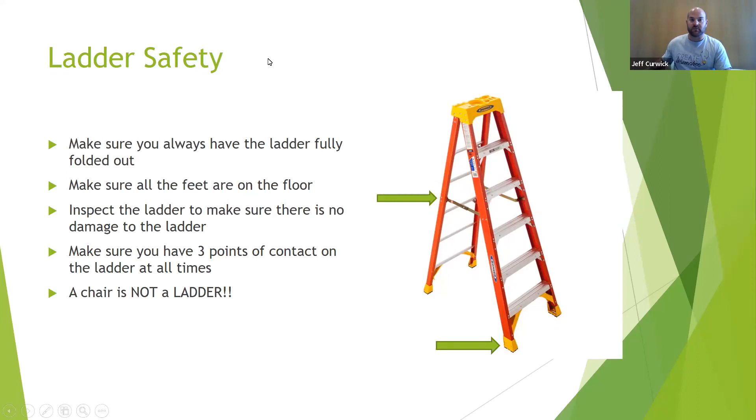If you don't have one, we need to get one. That is the best safety that we can have.

Electrical safety: the biggest thing is extension cords are not permanent solutions for not having an outlet. Extension cords wear out. I've seen them in classrooms running through the ceilings and coming out of the ceilings, from teachers trying to put their projectors up on the wall. That school has been torn down and replaced, and it was one that I opened, but we do not want to do that.

I want to make sure you look at your plug. Your plugs will still work without a ground on them—that's the bottom pin of a 3-pronged outlet. The ground is very important. Later in the slideshow, I have how to replace an electrical plug. You want to make sure you have that plug grounded.

Oh, I'm losing my connection, it says, but that's all right.

We'll keep going. If you're going to do anything with the wires in the wall, please make sure you turn the breakers off. That's pretty self-explanatory—we don't want to be dealing with live wires. Later in the slides, I'll have how to turn on and off breakers. When pulling anything out of an outlet, make sure that the breaker's off.

I have a good story for this one. I went into one of my schools and opened up the breaker panel, and the breaker kept popping. So I went back to the room to see what was going on, and a student had stuck a staple in the wall, which connected through metal in the wall, grounding it out and popping the breaker. Obviously I didn't want to grab that wire. I don't know how that student didn't get shocked or something worse didn't happen to them—burns, it could have started a fire.

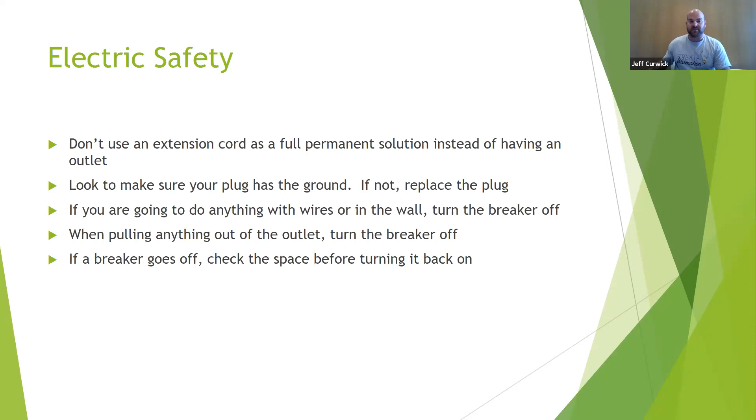We're going to get into HVAC, your heating and cooling systems. You probably see on the left side of your screen the two air conditioning units. Most of our library buildings will have that. Some will have chillers, which we'll get into, and then your furnaces.

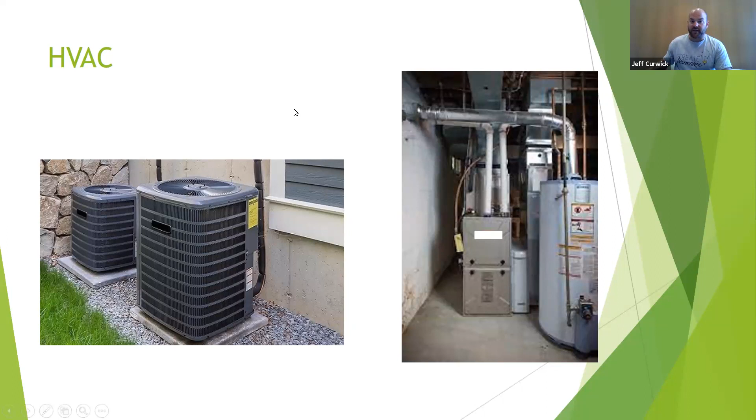In the front there, the white unit on the right side is a water heater, and right behind that with the white box on it is a furnace. So you probably have a room with 2 to 3 furnaces in it, and another space that has either a gas or electric hot water heater. We're going to get into more of that in some future slides.

Filter changes are one of the biggest things you can do for indoor air quality of your building. It's fairly simple to do. During COVID, we moved our filter changes in my building up to every 3 months. It's fairly cheap, it's very good. There's a whole bunch of different ratings on filters, we'll get into that, and your filters are on the return side of your system.

Some people may have filters in the vents in the ceiling, there might be vents in the wall that have filters on them, or there may be a filter on the return side. They can be anywhere from 4 inches, 1 inch on your smaller systems. In my system in this building, we have 2 sets of filters, one 4-inch and one 2-inch.

Fun fact, MERV 13 filters were actually made out of the same material that N95 masks were made out of during the pandemic, which made them extremely hard for me to get my hands on for our filters. But that's just a fun fact. I like to use MERV 11 or higher.

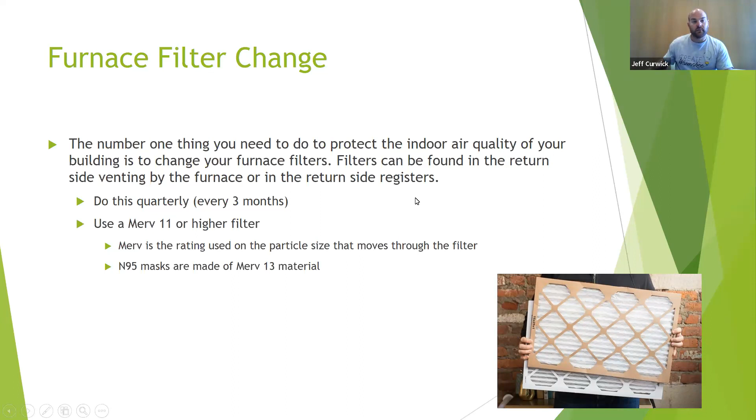Here's the filter scale for MERV, which I think is another good thing to have. We have 6 through 8, which lets large things through. 8 is for pollen and pet dander, up to 11 - and that's why I suggest 11 or higher, so you can get bacteria and that type of thing out of the air with MERV 11 to 13 filters. They usually cost a couple dollars more per filter. If you're buying them per case, it really doesn't add up to much, but it's going to make your air quality a lot better inside of your buildings.

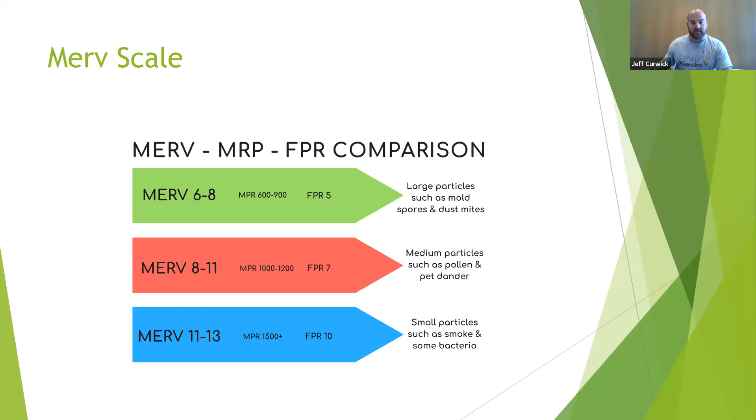With AC units, we want to make sure that we walk around and take a look to make sure they don't have debris on top - leaves, and I've seen kids throw rocks inside of there, or bark around the outside of your building. Walk up, take a look. The fans are on top, and you can burn a fan motor out fairly easily if there's something on top of that AC unit.

I have a company that comes out and checks a couple of my other buildings' furnace and AC once a year. You can do it once or twice a year. It's usually around $100 to $150 per unit to have them come out and service it. They check the pressures in the units and make sure everything's running properly. They'll go into your furnace side too and check those units to make sure the burners are clean, your igniters are clean, which make them start, and those type of things.

In the wintertime, we cover our units in Wisconsin. We do have ice and snow that get on top of our AC units, on top of the fans, and get inside of there. So if they are covered, please make sure you take the cover off. This actually happened at my house - I covered the unit, and my wife turned it on without uncovering it, and it burned up the unit. It was on for a while. The unit gets pretty hot, hence why the fan is on there, which sucks the air through the unit to disperse the heat. We'll get into that more with chillers, but it's basically a small refrigerator that's being used. So that's why we cover our AC units.

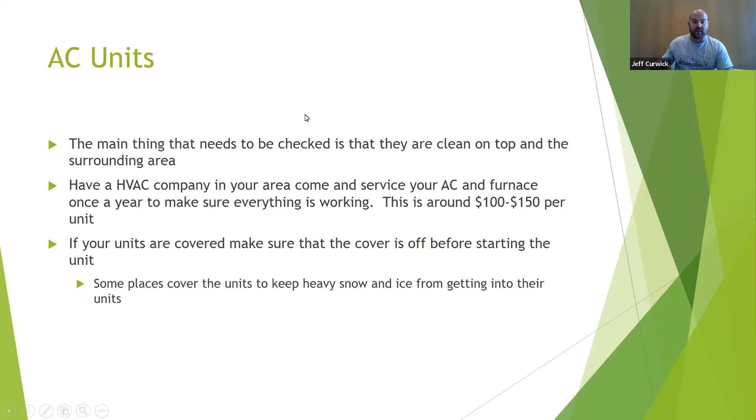Gas shutoffs - I was at a library recently, and the director did not know where the shutoff was. In my photo right there, you can see the arrow, that's a gas shutoff. You will have the gas shutoff on your hot water heaters, and you will have them on your furnaces.

If you do smell gas, go turn that shutoff off, sweep your building, and send everybody out. Gas will smell like rotten eggs. You can call your service provider - down here, I've used MG&E.

We had this happen in a kitchen at one of the schools I worked at, where it smelled like gas. So we actually shut everything off and evacuated the building. The gas company comes out and they have a detector they use - they call it a sniffer - it has a long wand on the end, and they can stick that into where you believe the gas is coming out and take a reading to let you know if there is a leak or not. We luckily did not have a leak at that school.

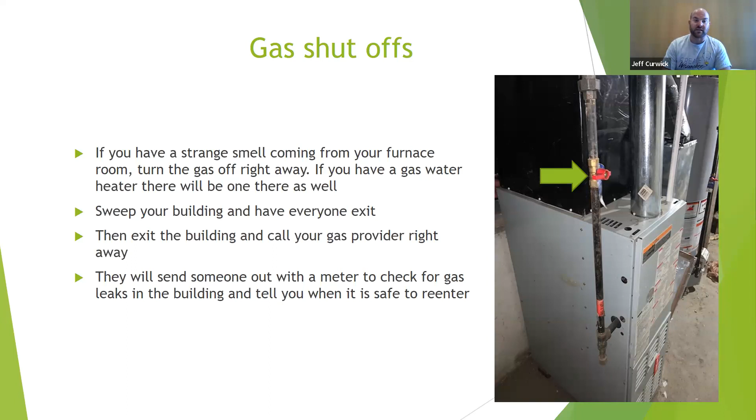Sometimes you'll get leaks from some fittings that just develop over time. If you smell that, the first thing you can do is check your floor drain, which we'll cover later in the slideshow. If it's not coming out of your floor drain, then shut your gas off, evacuate the building, and call your gas provider.

Boilers. Some systems have boilers. Boilers can be used in my building here. I have a boiler.

Boilers are on the hot water side of your system. So if you have heat registers that run on hot water, in-floor heat will actually have boilers. We have in-floor heat in our children's area at the building here, so that uses our boiler.

They're basically just a hot water heater on steroids. They're ginormous. They are a closed system, so you don't have to add water or take water out of the boiler system.

They actually have antifreeze in the boiler called glycol, so that if the water gets below 32 degrees, which it should never get below, it won't actually freeze. I've had the water as low as 20 degrees in one of the schools I was at, and it didn't freeze. That system was a geothermal system without a boiler.

So we want to make sure we do that. Most of the time in your buildings, it'll run off gas or natural gas, is how your boiler system will work. They do run off of oil and wood. So if you drive by in rural Wisconsin and you see a wood burner outside, a big shed with smoke coming out of it, that's actually a boiler system.

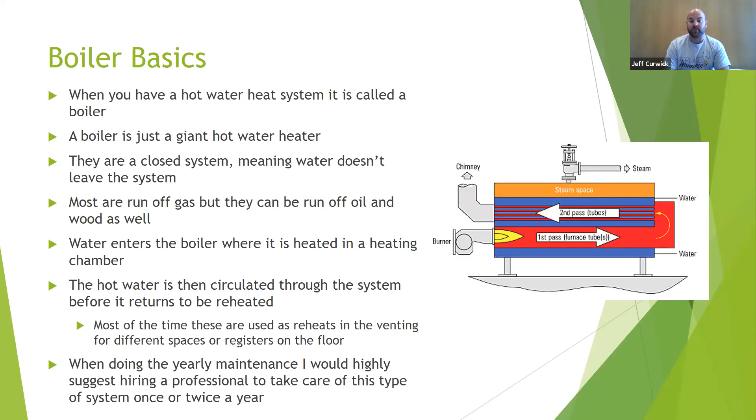Here at my building, I get it twice a year. I get it once in the spring, they come through and go through my cool water system, and once in the fall, they come through and go through my hot water system.

So this is our chiller. Our chillers are just like our hot water side, our boiler side, but it is cold water that is used to go through. It is basically a giant refrigerator unit. So what you have in your refrigerator is on the floor or in an air conditioning unit. This is huge, we have a giant one on our roof.

They can be wet or they can be dry. Basically, the difference is what cools the refrigerant down. It's either water, but most people will have a dry system, which is air, which is the same thing as our air conditioning units that we had in earlier slides.

Basically what happens is water gets pumped into the evaporator. The evaporator comes in, it takes and uses refrigerant and pressure to squeeze the hot air out of the water, and it comes back out into a tank, which is then pumped through our systems, and we're using that air to then cool the spaces that we need it to cool.

The biggest thing that we need to make sure that we do is that our condenser units, which are outside, the big units, are free of leaves, and the same things that we checked for our AC units, we make sure there's no leaves.

The biggest thing that I get, and that most places will get with this, will be leaves, those little helicopters that come off of the trees, the seedlings, and then cottonwood. I have along a creek, so I have a ton of cottonwood that gets in here. In cottonwood season, which was just last week, I have to go up there almost every day.

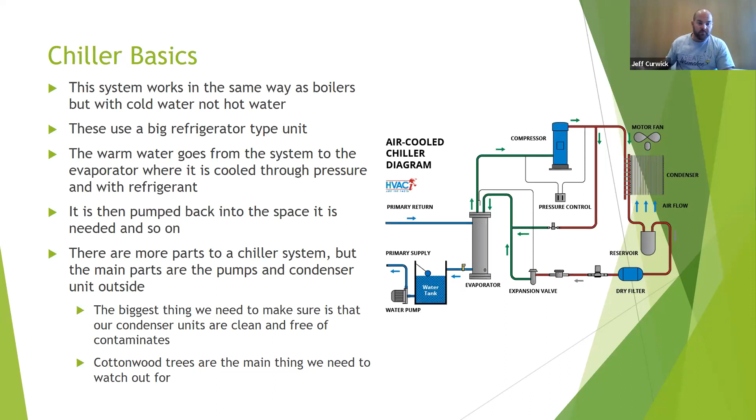So that is our basics on our HVAC systems. Now we're going to get into some plumbing. Plumbing looks like this. People look at this and say, oh my gosh, what am I going to do with plumbing? There's the sewer side, there's the hot water side, there's the cold water side. It's leaking, I don't know what to do.

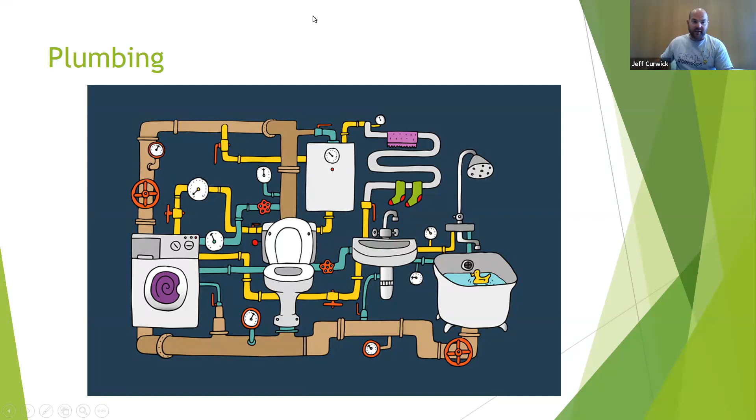One of the big things that most all drains on the sewer side have is called a P-trap. A P-trap is basically a plumbing trap where the water sits just above the line of where the sewer comes off and goes into the wall. If you look at this lower one, the P-trap is the lower U shape right here, and water will fill up from right there to right there, if you can see my cursor. So what happens is this stops sewer gas from coming into our buildings.

So if you drop jewelry down a sink, which you very well might run into in a library setting, somebody might drop an earring or their ring down the sink and it falls down. It's going to be heavy enough that it should most likely fall into the P-trap. If it falls into the P-trap, there's a slip joint at the top and a slip joint at the bottom. Take the bottom rear slip joint and loosen that one all the way off and push that up towards the wall. Remember, there's going to be water in here, so it will go on the ground, so put something to catch the water underneath. It won't be much, should only be about a cup or two.

So 8 ounces, 16 ounces, it's not going to be a lot. Loosen up this upper slip joint as well, and you should be able to pull the P-trap straight down, dump it out, and your jewelry or whatever fell in there should be in there. So it didn't go completely down the sewer, didn't go everywhere. It should be sitting in there. If it's not, well, then it's gone. But the best thing you can do is take this off. It'll be in bathrooms, kitchens, everywhere that has a drain should have a P-trap on it.

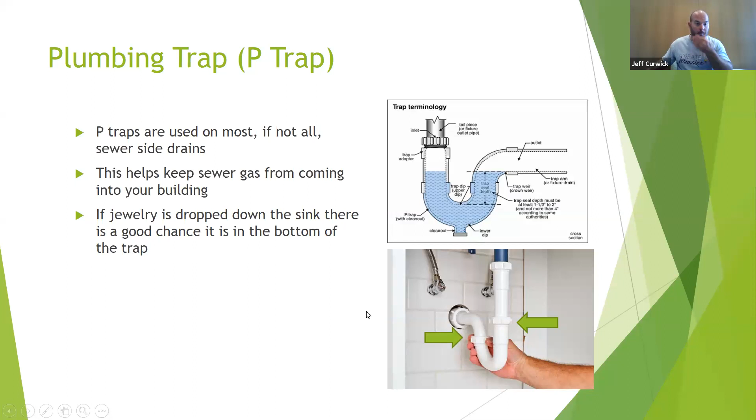Floor drains. These will be found in your HVAC closets, anywhere that you have air conditioning that runs in. It's a very big, common problem.

I actually went out to a library. She had been smelling something, the director, in her HVAC closet. And she called and said, I think I'm smelling gas. They came out and said you weren't smelling gas. She had been there for about a year, and I went out there to look at her building. I put my hand right on top of the floor drain, and you could actually feel some air coming out, which tells me that the water had dried up in the floor drain.

Under the concrete will be one of those P-traps. What I was always told, and what I believe is probably the best practice, is to put 8 ounces of water per inch of diameter across your pipe about once every 2 to 3 months. So basically, if you have a floor drain, put 2 to 3 coffee cups of water down there. It'll sound hollow when it falls down into the drain. You aren't going to put too much water down there. It will go down into the sewer. So fill that P-trap up, and you should lose that smell of rotten eggs coming out of there. It is just sewer gas. Sewer gas isn't dangerous, it just stinks.

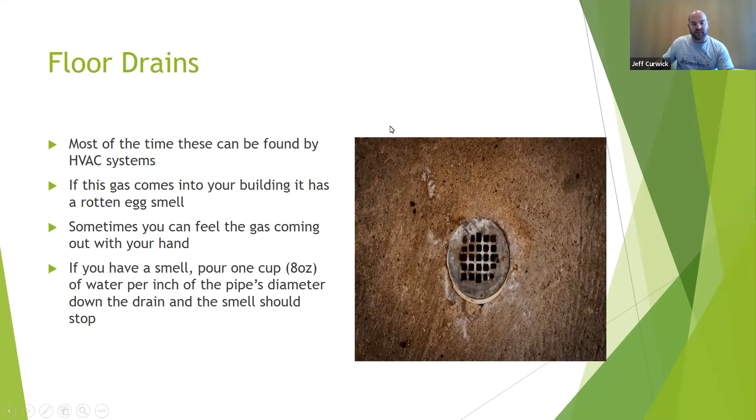Shutoffs. If there is water on the floor, check your trap. If it's not your P-trap that's leaking, turn off your water valves. Your water valves are everywhere there's an arrow - there's one on toilets, there's one on sinks. These shutoffs should just turn, and it will turn the water off going to the sink or toilet. If you have a toilet that's leaking or plugged, about to overflow, turn your toilet shutoff off, plunge, do what you have to do. It will not fill the tank up in the toilet anymore when that shutoff is off.

If you feel comfortable and you're getting a leak on the opposite side of the shutoff - from the shutoff to the sink or from the shutoff to the toilet - and you want to tighten it, go ahead and give it a tighten. What I would suggest is that you hold the shutoff with pliers so that you do not turn the shutoff on the pipe coming out of the wall. It could be soldered on, could be brazed on, it could be just compressioned on.

If it's leaking from the shutoff into the wall, then you're going to have to shut your main off to your building. It should be outside. You should have an idea where your shutoff is, and call somebody. But if you need to get a plumber in and it's dripping water and you don't know where it's coming from, or your sink is leaking and it won't shut off, you can just turn this valve and it should shut the water off to toilets, sinks. You should have them on your dishwashers. If you have one in your building, your water in your fridge should have one. Anywhere that water is should have a shutoff somewhere.

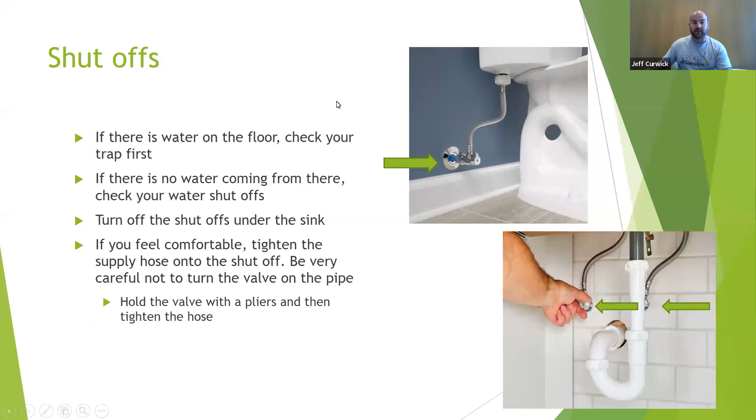Outdoor water - your outdoor water will have a shutoff as well. So if you go outside and turn your outside hose on and it doesn't come on, there's most likely a shutoff like the two that I have on the right here, in your building where that water supply is coming from. We do shut these off in Wisconsin - we do not want to have them leaking outside and have water in them when we get sub-zero temperatures.

So inside the building, usually in a ceiling - I think all mine are in the drop ceiling - there's a valve like this that I can turn. When the handle is facing the pipe, it's open. When the valve is perpendicular to the pipe, it is closed. You'll follow it where it comes up into the ceiling, where it comes into the building - it should not be very far. There might be a twist style valve; you can either twist those closed or twist those open. Most newer buildings, or any pipes that have been replaced over time, will have this style ball valve. This is what you'll see outside your building.

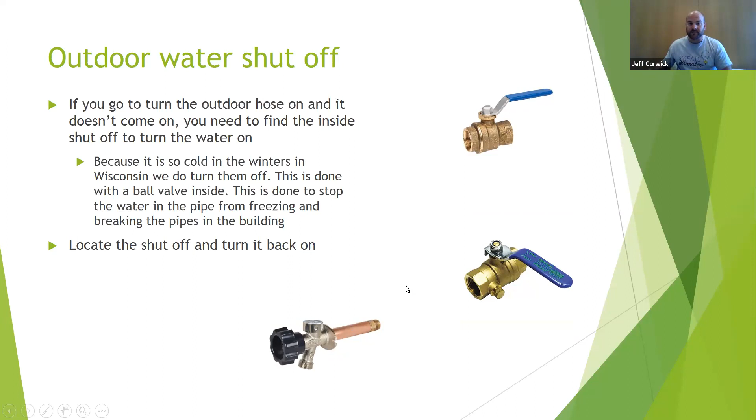Electrical - now we're going to get to some electrical light bulbs and that type of thing. So LEDs versus fluorescents. I very highly suggest that you check into switching your fluorescent tubes - these are your 4-foot light tubes in your ceilings. This is one of the biggest payoffs you can have in saving energy for your building.

Roughly - this is a very rough estimate - for every 24 hours, 24/7, if you left a light on with a 32-watt bulb, that's going to cost you roughly $32 a year to run that bulb. Most of our T8, T10, or T12 light bulbs, your 4-foot bulbs that most commercial buildings use, have 2 to 4 light bulbs in each fixture. So that light, if running 24/7, would cost you $64 to $128 a year to run each one of those light bulbs.

LED retrofits - retrofit bulbs - you can order them by the case. You can get them at Ace Hardware, you can get them at any hardware store. Those usually cut that cost in half, so your $32 a year gets cut instantly in half. It's one of the fastest upgrades you can do to your building, and the LEDs last for like 10,000 hours.

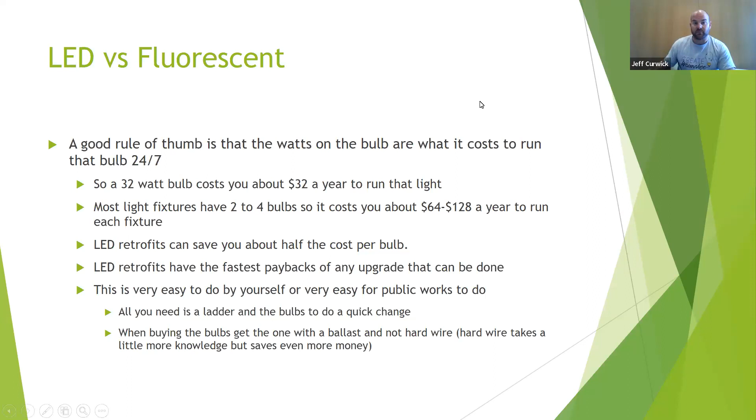Light colors—this gets interesting. It's one of my pet peeves in a building: walking in and looking up at the lights and seeing 3 to 4 different colored light bulbs.

The whiter the light, the truer the color. So if you go into a grocery store and look at the produce section, they'll have a very high Kelvin light, 7,000 to 10,000 or greater, to bring out the color of your apples and greens.

The yellower light can actually be easier on your eyes during the day, as it's not so bright. But for a library setting, with books and people reading, a higher daylight style, higher Kelvin, might be better. I think we have 4,000 Kelvin in our building.

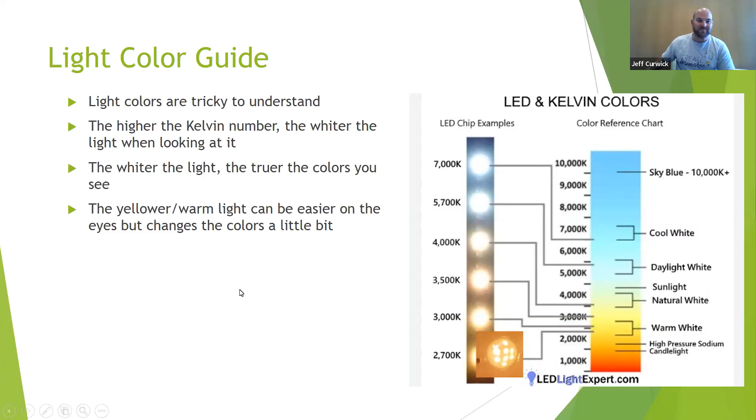So this is where we talk about replacing that grounded plug. It's fairly simple and not very expensive to do. You can get the plugs at Ace, or your hardware stores—Menards, Lowe's, whatever you have.

There will be a silver screw on one side—put the white wire on there. There will be a bronze screw on the other side—put the black wire on there. And there will be a green screw where you put the green wire, or bare wire. Sometimes there's a bare wire in there—that's the ground, on the bottom of the two.

You'll then slide the end back on, tighten the clamp down on the wire, and tighten the whole setup. That will give you a new, safe grounded plug on the end of the wire.

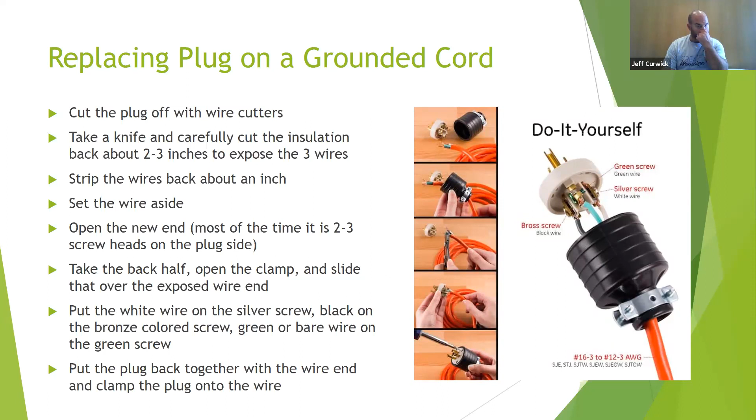You'll have these on your coffee makers, your extension cords, your vacuum cleaners—that's a big one I see missing a ground, is a vacuum cleaner. The ground is on there for a reason: if it were to come in contact with water, or you suck up some water, for safety you're going to want to keep that grounded plug on there.

GFI outlets you'll have in your bathrooms, your kitchens, anywhere that water could be present. It's basically a small circuit inside of the outlet that keeps you from getting electrocuted if there were to be water present. If you plug something into the outlet and it doesn't turn on, and you see it is a GFI outlet, which will have 2 buttons in the middle of it, we need to reset that.

What you might have is a kitchen where there's a bunch of outlets connected to one GFI. In my home, there's one GFI outlet by the door, and every outlet in my kitchen runs through that GFI. We have that in our caterer's kitchen at my building as well. There's one GFI, and I think there are 3 outlets per GFI connected to it. So this is the first thing you want to check.

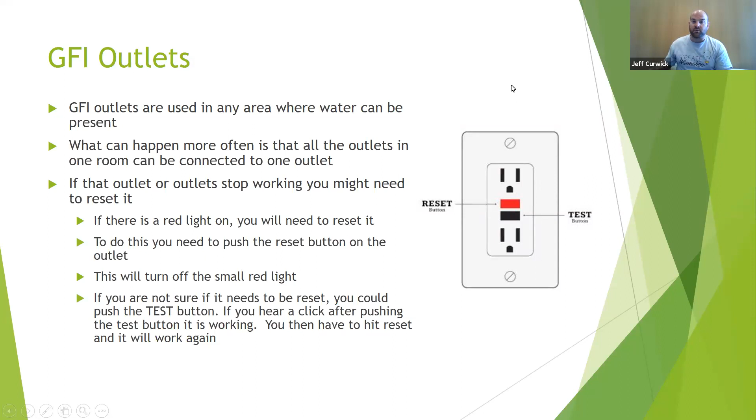If that is not the case, then most likely you popped the breaker, and that's what we have next: breakers. So what you have to do is locate the breaker panels in your building. I think here I have 8 breaker panels. They can be all over the building.

After you've located these, you can open the door and find the breaker that is in the off position. Off position is usually towards the outside of the panel. So if you look through and see some facing the outside, there's usually spares in each of your panels. But if you have a very old building that has been converted over the years with outlets added and things added, lights, cameras, computers, these most likely won't have any spares in them.

I know I have a building in our village hall that doesn't have any spares in any of them. There might be another panel off to the side of the breaker, which could be an additional panel added for like AC units. Furnaces might all be in a second panel added to it.

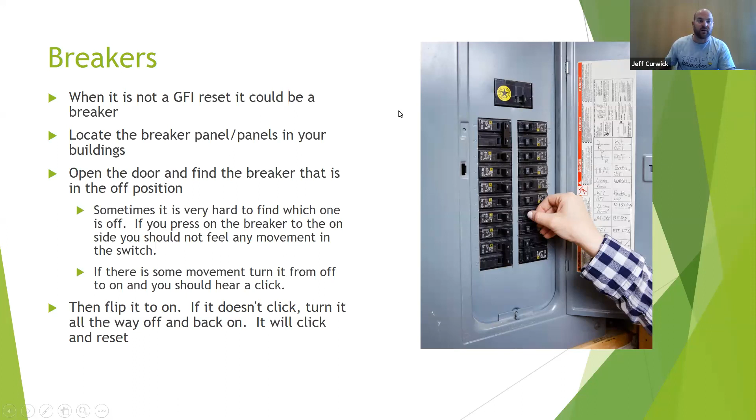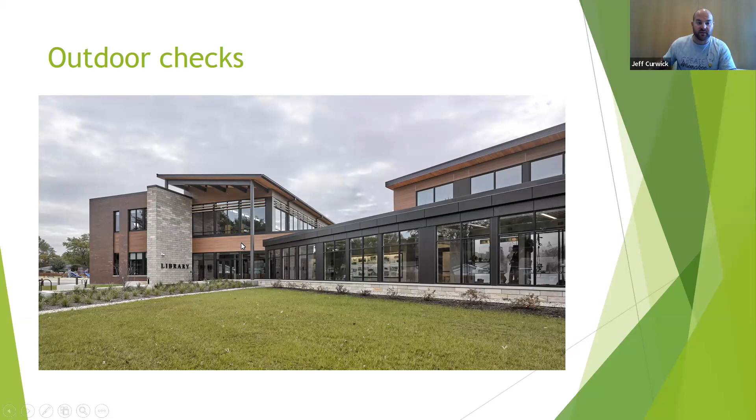We want to do some outside checks on our building. So when we walk around, we want to visually check the outside. I want to look for things on the roof. I want to look for cracks in the sidewalk that somebody could trip on. If I have a raised sidewalk as I walk in, maybe I want to paint that.

Maybe I want to change, call somebody, see if it can be ground off from the village or the municipality. Broken windows - our old building right now, kids were throwing rocks and broke 2 windows. I have a company coming out to change the windows.

We usually have 2 panes in Wisconsin, so a broken window on the outer pane does not mean somebody can get into the building. It'll just shatter and there'll be 2 sets of windows.

Call a glass company. You usually do not need to change the entire window. A glass company will come in and change the sash of the window, which is just the insulated glass part. They come, take the window apart, and put a new piece in. Same with your glass doors. This will save you a lot of money in the long run. It's the same glass, the same insulation you have now, but you don't have to change the frame.

A lot of people will think you have to change the frame. You actually don't - look up window glass companies in your area. They can just change the actual sash itself.

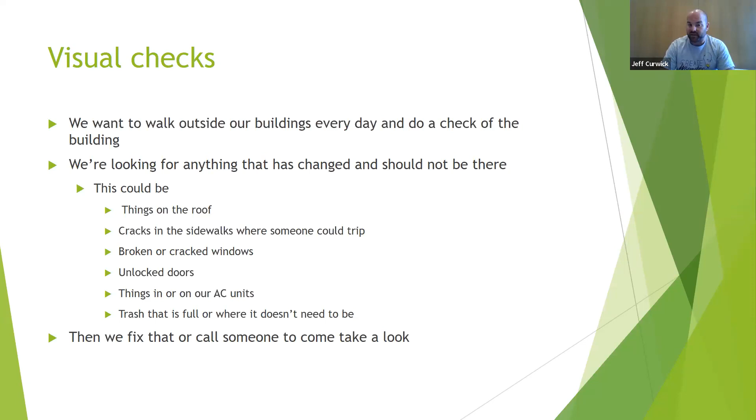We want to look at our AC units when we're outside, make sure there aren't leaves, make sure our cottonwood hasn't filled up our AC unit, and check for trash. We just don't want a dirty building. So if you need to get something fixed, call somebody if you're not able to take care of it, and they'll come take a look.

It could flood areas of your entryway, your basement. If we get a big long hard rain, or one of our winter rains in late fall and it clogs up with ice, we want to make sure we get that off. The best thing you can do is set up a ladder if you feel comfortable, get up there, and take the clog out. Most likely it's leaves, pine needles, sticks that have fallen on our roofs, or ice.

I've seen squirrels make nests in there. Sometimes I've seen where they haven't been cleaned out in a really long time and trees are starting to grow out of there with roots. So you want to get up there, use ladder safety, make sure your ladder's secure. If it's uneven, outside, or wet, you need to have somebody come help you hold the ladder, crawl up there, grab the stuff out, and just throw it away.

Most of the time you're going to find this in your downspouts, where the gutter enters the downspout. Our leaves will fall on the roof, our pine needles will fall on the roof, rain will come and wash them down, the gutters will fill up with water and wash them to the downspout, which at this building goes down into the sewer or into the storm water retention ponds out back before going into the creek. Or sometimes it just runs out onto the ground - that's okay too.